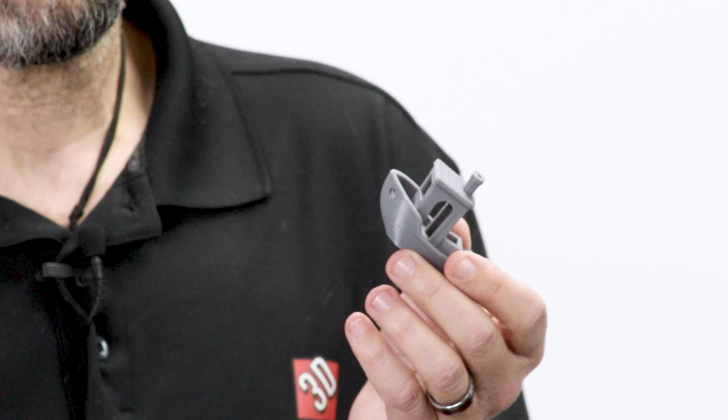Benchy because this is actually the test print that came on the SD card. First company that I've ever seen do that. I can't say the first company that's ever done it because I don't know that for a fact, but first company I've ever seen. And here it is, and it came out great. So there was no calibration, it was a pre-sliced G-code file, done.

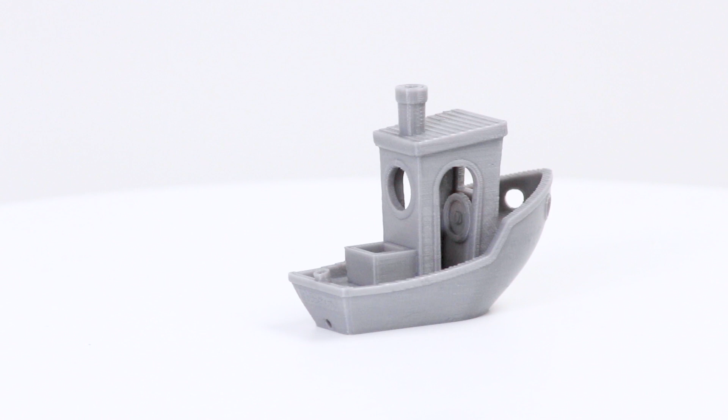We wanted to get a little bit more creative here. So, who doesn't love Stan Lee? I love Stan Lee. Anyway, found this model, I believe, on MyMiniFactory, and just wanted to slice my own file. So let's take a quick look at the screencast and I'll show you what I did, and then you can watch it print. Oh, exciting, I know. Take a look.

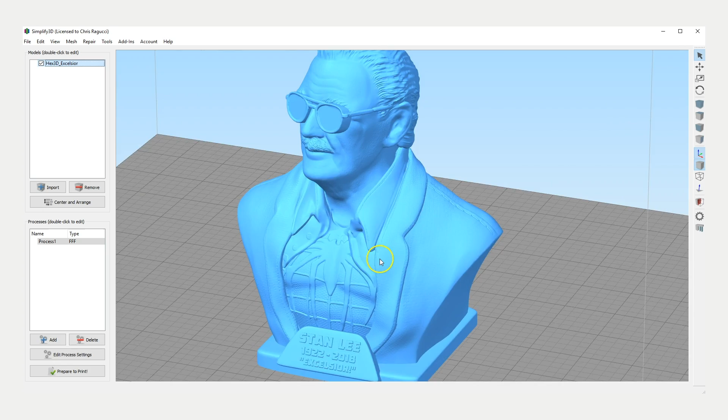Okay guys, here we are in Simplify3D. I've imported the model already. This is Stan Lee. Take a look at him here real quick. All right. So let's go to the process here. Now we're just doing the first single left-hand side extruder here. So I have mine named after Transformers, as you probably all well know. T-Rex is Grimlock, so here we go.

Single left. So we're going to do this at 0.2 millimeter layer height, 5 top, 5 bottom, 2 shells. I always do my first layer height just a little bit thicker, just so I get really nice adhesion on the bottom. I am going to add supports, and I always use a brim, and I'm going to run this at 70. So let's take a look. I'm going to actually let it auto-generate supports because this model doesn't really need many supports, so what it provides will be okay. So we've got that going.

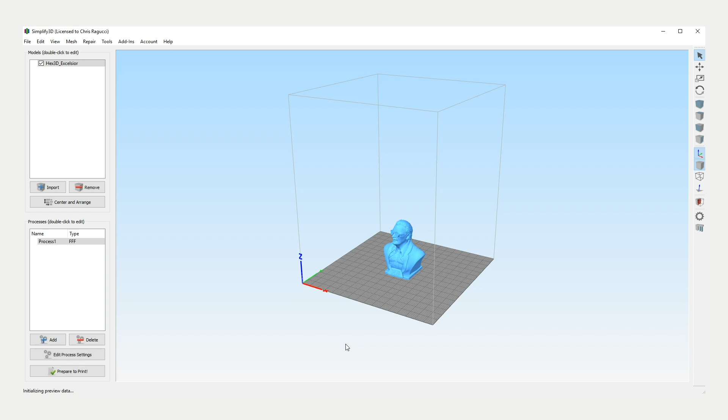I'm going to prepare it to print. And here we go. Here's what we have here. So it's just popping these supports in down here. A little bit here, a little on his face, and that's okay. I'm gonna exit out of here for a second again, just so you can see the supports, the way they're set up. Actually, we should bump this up a little bit.

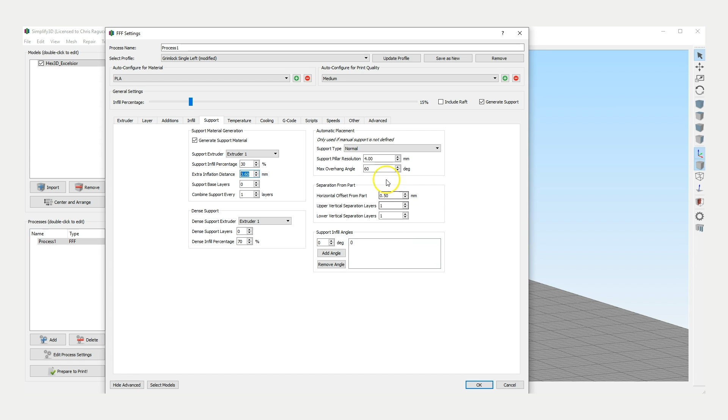I typically go support infill at 30%, and the extra inflation distance doesn't need to be quite that high, so we'll put that at 0.6. And whenever I use a 0.4 millimeter nozzle, I usually find it's okay to do vertical and upper and lower separation at 1 layer. And I don't particularly enjoy using dense support layers. I have a really difficult time pulling them off. So let's go back and we'll reslice that.

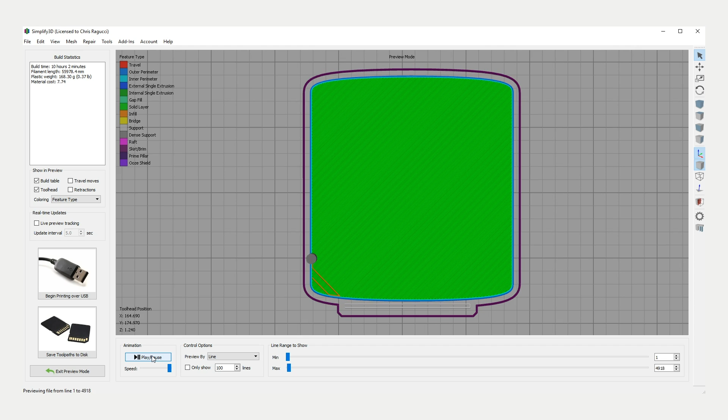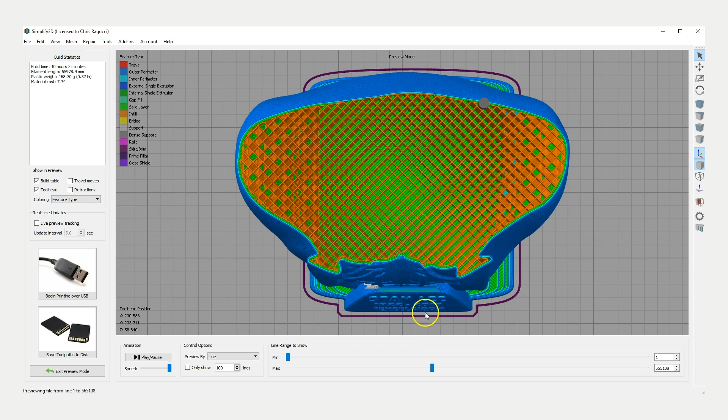And here we go. So let's take a top view and we'll run through the slice real quick. And we'll just speed through this a little bit. You can see where it's putting the supports in there. Right there, just in case you didn't see. And we'll keep going. All right, that looks great. And there we have standard left only extruder mode.

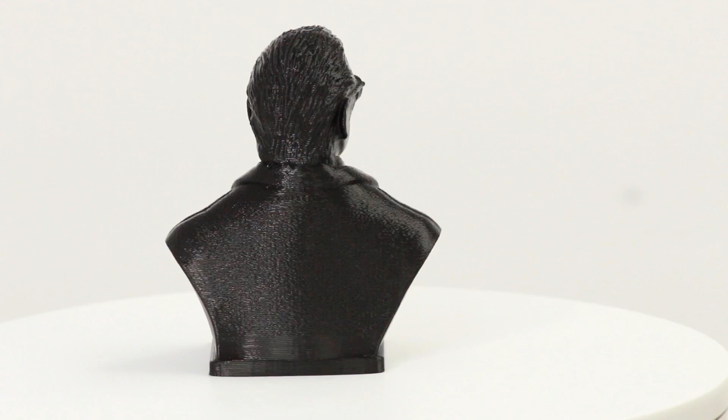All right, and it is a dual extruder machine, so I suppose I would be not doing this machine any justice if I didn't show you a dual print. Now, keep in mind, I didn't super calibrate the machine, so there's a little color bleeding in the print, but here we go. Ta-da! 2-color print.

I also used an ooze shield and a prime pillar. There's a difference between a prime pillar and a purge block. A purge block is just something you would see on something that's multi-material or something that prints with 2 colors out of the same nozzle.

Prime pillar, all this does is when one extruder stops and the next extruder moves out to print, before it starts to print, it actually just runs a little square and fills it in, so it primes the nozzle, the filament's moving, and then it just jumps right over and starts the print. So it helps. So did that with these. You can see my ooze shield had a bunch of goo in there. That would have been on the print if I didn't use this.

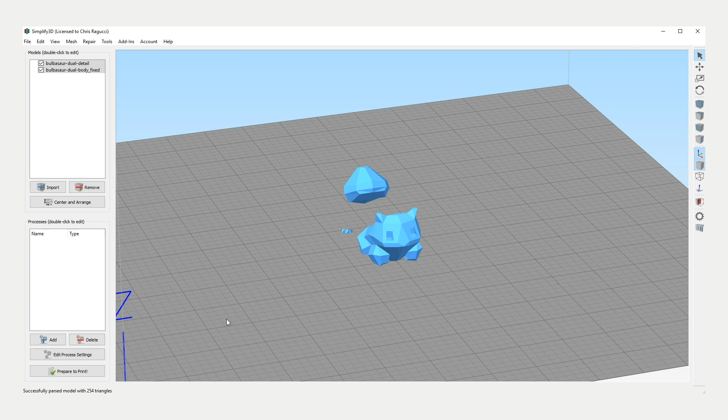And here we go. But I'll show you how I slice that right here. Okay guys, here we are with the Bulbasaur, and we are going to do our first dual extrusion print with the T-Rex. So I've already imported the models. Now you can see this is 2 models. So here's part 1 and part 2.

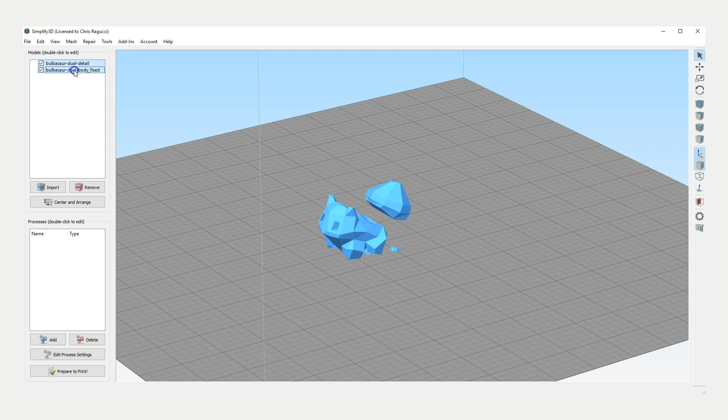Now, for those of you who don't know, in Simplify3D, there's a great trick to align these models. So you can actually go up under Edit, and you can do Align Selected Model Origins. But I only had one selected, so that was dumb. So again, we'll do Align Selected Model Origins, and it puts them exactly where they're supposed to be.

Now, there's a shortcut to that. If you hold down Shift and click Center and Arrange, it does the same thing as long as you have all the models selected. So there you go. Neat trick. It took me about a year before I learned that one, so you're welcome.

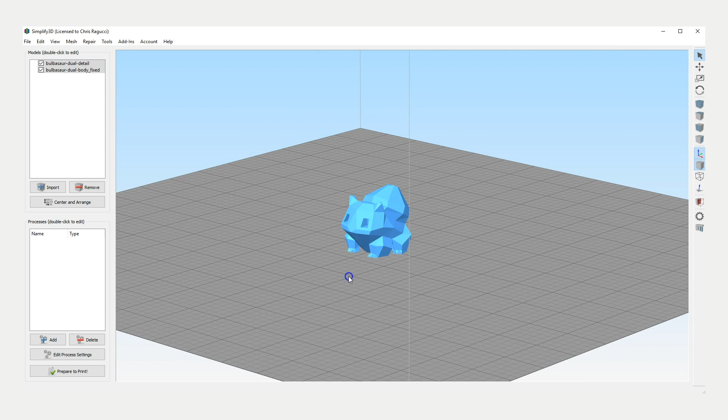Anyway, so here's Bulbasaur. Now what we're going to do is we're going to use both extruders on this. So I'm going to add my first process, and it's going to be Grimlock, as I already said, Transformers. Yep. So Grimlock left dual is going to be 1. I don't want to save those changes. And then we're going to select the models. And I'm going to select the body.

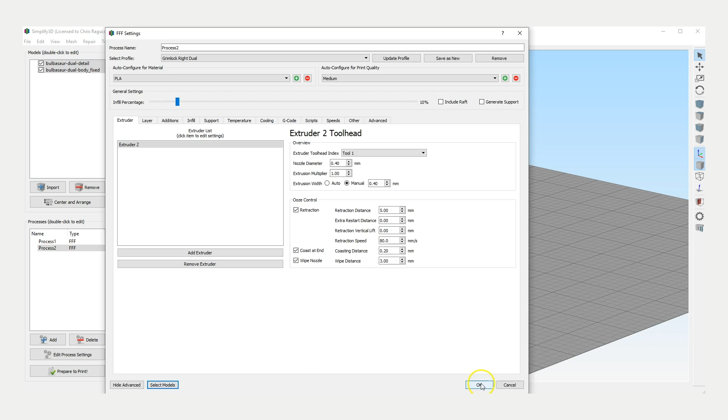And now I'm going to add a second process, right dual, and I'm going to select just the detail. Okay, so now just quickly before I do anything else, I'm going to show you how that works. So if I hit Prepare to Print, I select both processes, and right now it's just showing you the feature type. Now I'm going to change it to Active Toolhead.

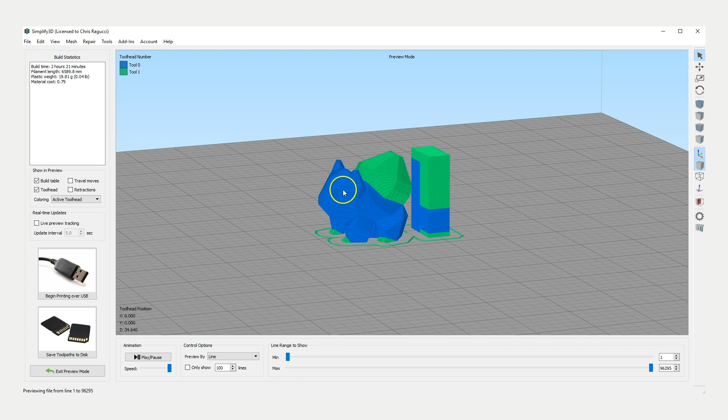So you can see, very simply, the left extruder is going to be printing what is on screen as blue, and the right extruder will be printing what's on screen as green. So you'll probably notice this guy back here. This is not a purge block. Do not get it confused with multi-material devices that print out of the same nozzle. This is a prime pillar. Kind of the same thing, but not really.

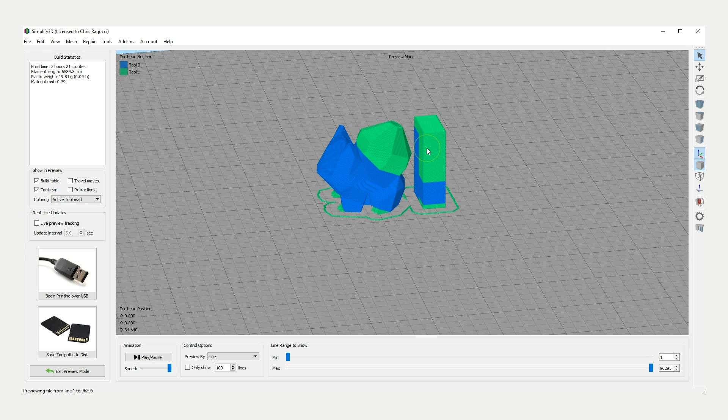What I do is I have the prime pillar set up, so when the extruders switch, it just prints one little layer on this block just to prime the nozzle because it's been sitting. So I want that filament flowing nicely before it actually starts to go over and start my print. So let's go back out. And we'll just show you.

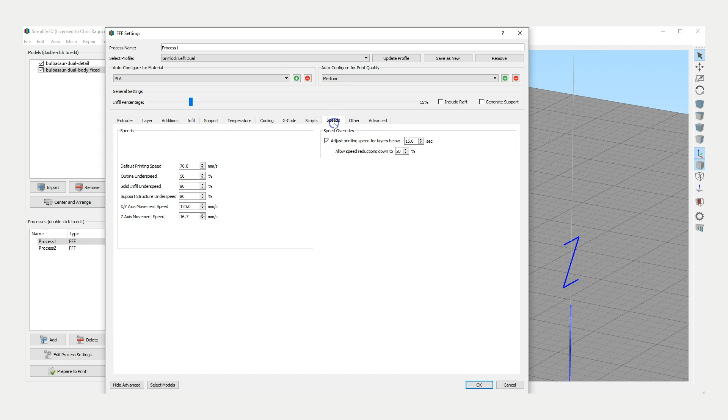So we're going to do the same thing, 15% infill. We're going to do the same thing with the 0.2 millimeter layer height, 5 top and bottom layers, 2 shells, and all that good stuff. Speeds, we'll do the same thing at 70. And we'll go back, prepare to print.

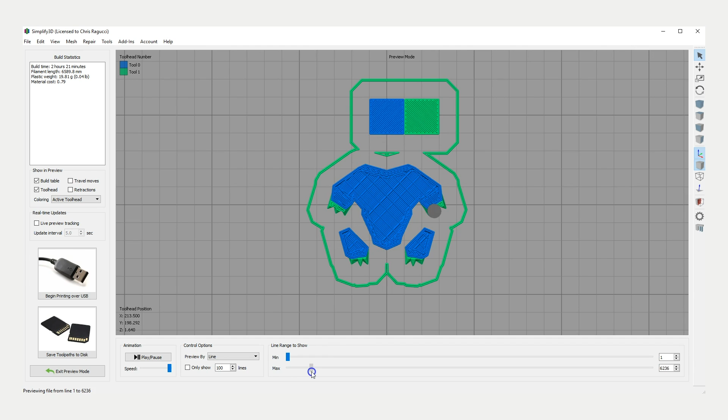And here we go. Let's get a top view going. And I will show you again. This time I'm just going to speed through it. So you can see it's printing both colors 1 layer at a time. But right now you notice that over here, it's only printing in the blue. That's because there's no green. So it's only printing with the left extruder for these layers, not the right extruder.

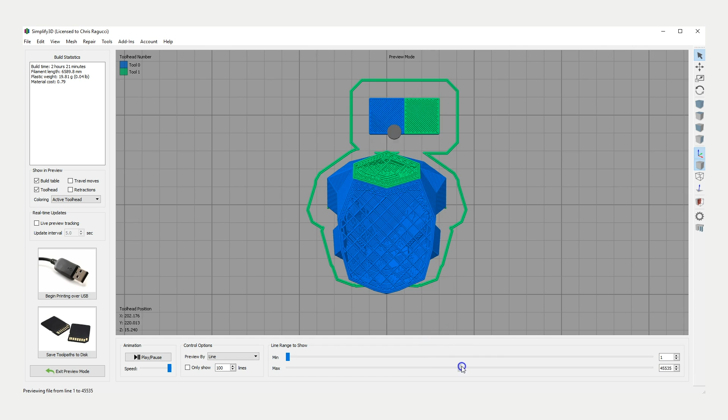And we'll keep going. And then as soon as we get back to a point where it's got to print in 2 colors again, you'll see that that switches back right there. So now it's starting his shell here, so it's going back to the other side too. And there he is.

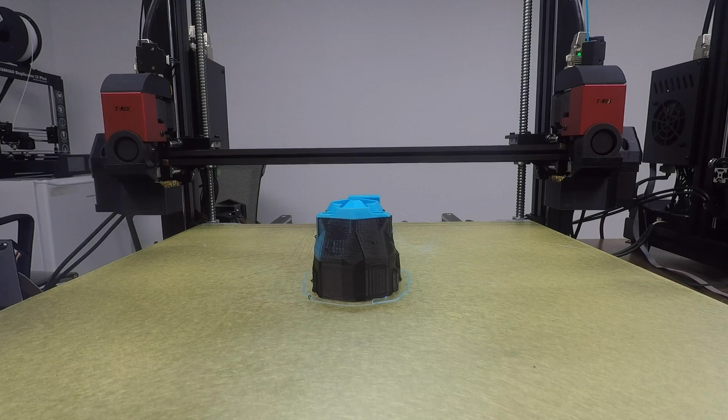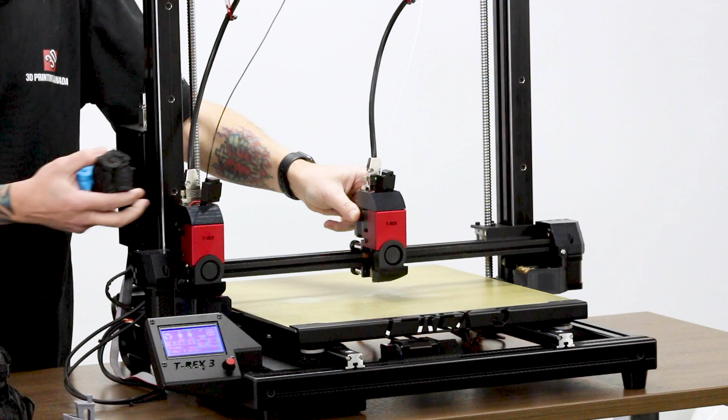All right, the next mode that I want to talk about is really cool, which is one of the major features that drew me to this machine ages ago. So this is duplicate mode. What you basically do, and I will show you in a second, is you set up your slicing profile and you basically cut your bed in half. One extruder moves over and then they move in unison and they make the same print twice.

So you can see on the right, which is tool 0, I printed an owl. On the left, which is tool 1, I printed an owl. They're the same, except they're different colors. This one's black, this one's blue. You get the difference, right? Anyway, so that's actually super easy to do, and I will show you how to do that right now, and then right after that, you can watch a time lapse of the print.

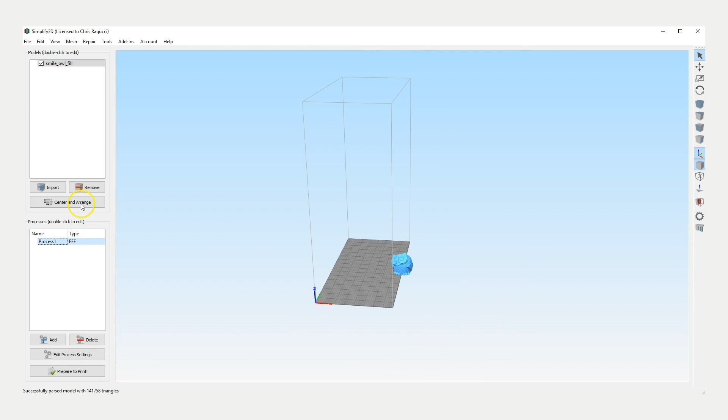Okay guys, here we are. Now we are going to do something really cool. This is called Ditto mode. So I've already dropped the model in place, and I don't have any process set up yet, so I'm going to add a process. This time I'm going to go to Grimlock Ditto. And you're going to see what happens to the bed right now. Now it actually takes the bed and it cuts it in half. So I'm going to center and arrange that. So my model is sitting right in the middle.

Now, I don't want supports on this model, and we're going to go with pretty much the standard settings that I usually have. Let's see, my retraction is probably set a little too high, so I'll go back down to 5 on that. And top, bottom, everything the same.

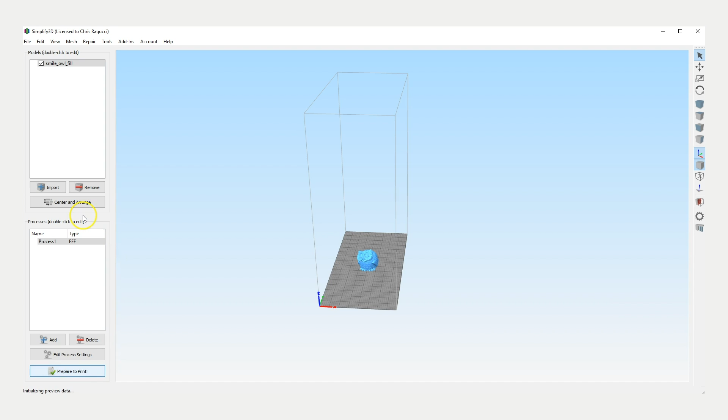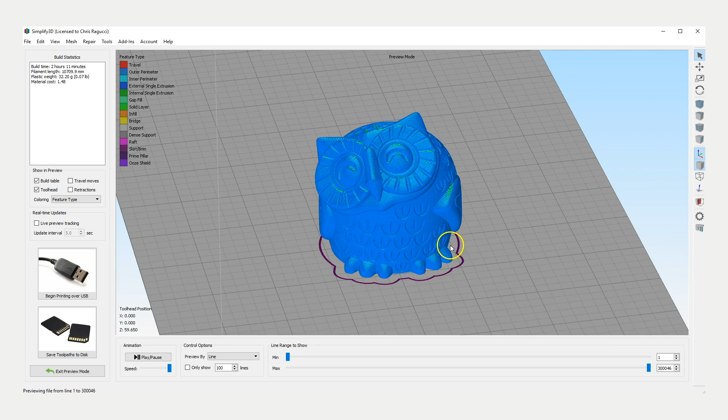So we've got the owl. We'll do a quick run through here. Just moving up. It's a lot of infill. Whatever, we'll leave it.

That was my cat jumping up on my chair.

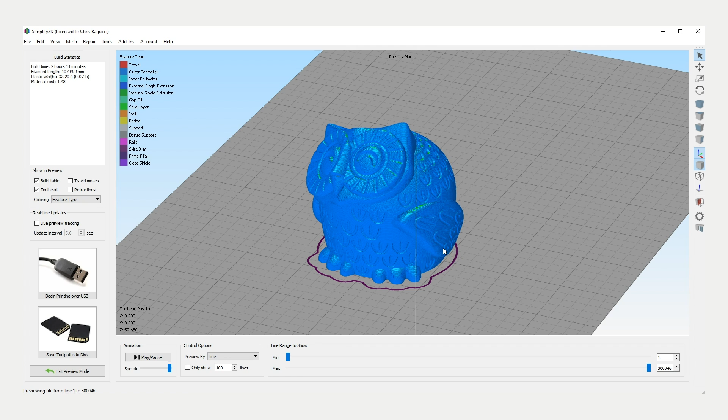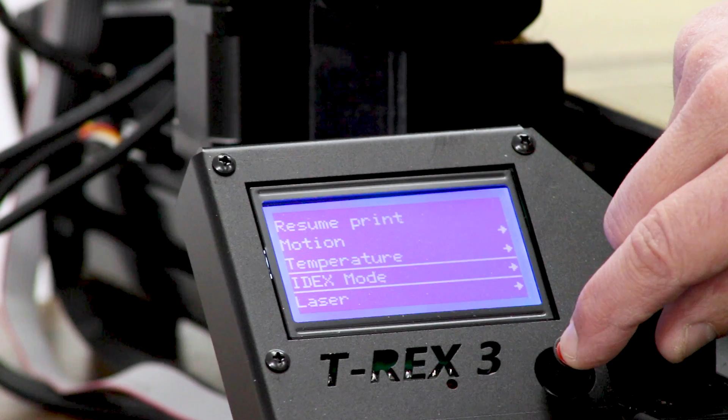And there we go. So now, when we go back to me on the camera, I'm going to show you how this works and how it prints 2 copies of the same thing. So stay tuned. Okay, so something they added in the new version of the T-Rex 3, which I think is a much, much better way of doing things, is you can just control this mode situation here on the screen. So if you go into IDEX mode, I am going to choose duplication. As soon as I do this, watch what happens. I'm going to get out of the way.

So now, as you saw in the screencast, I took that bed that was basically cut in half, so it's only 200 millimeters this way, but still 400 and 500. These 2 extruders are now basically locked together, and they're gonna print 2 identical pieces. Just like this. In fact, it's these 2, because I already shot the time lapse. Shh, don't tell anybody, but watch it here.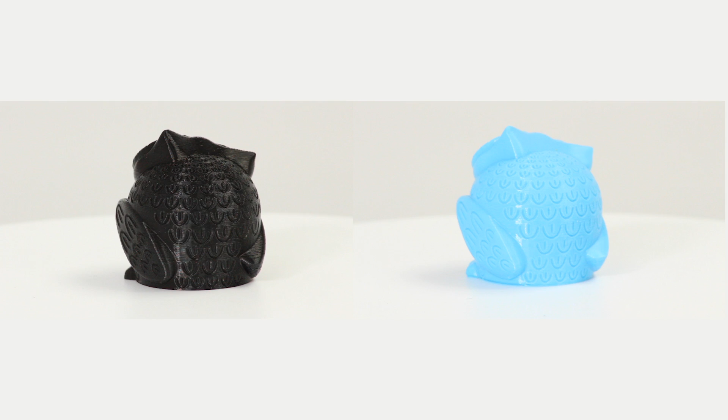Okay, one more mode I want to show you. Mirror mode. What's different about these? They're not duplicate. They are opposite. That's mirror mode. This is a new feature they added in the T-Rex 3. This is not available in the T-Rex 2 Plus or the T-Rex 2. This is new and exciting and fancy. So it's actually pretty easy to do. It's pretty much the same way.

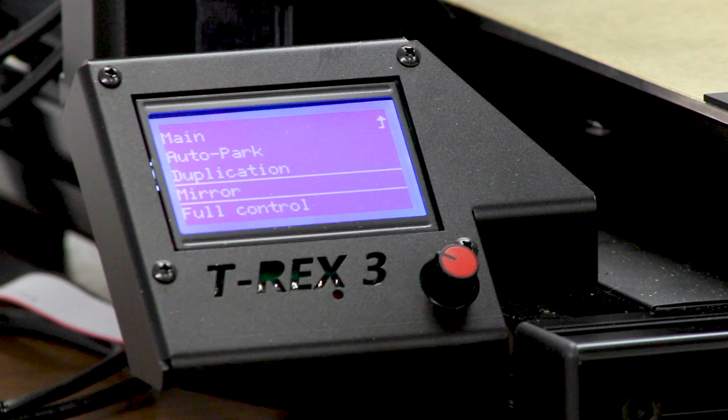I'm gonna come back around and show you how that one works. Go back into IDEX mode, and then just go to mirror. And it's gonna basically do the same thing. And now it's ready to print in mirror mode, except when it prints, you'll see in the time lapse, they're not, I don't need to explain this, you know what I'm talking about, you'll see it. Anyway, watch how I sliced it, and then watch the time lapse.

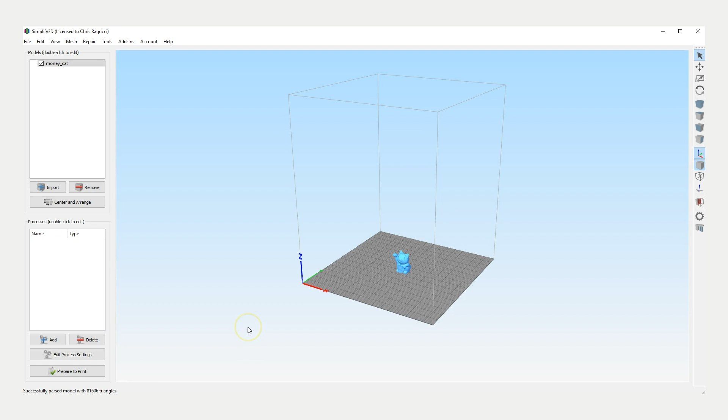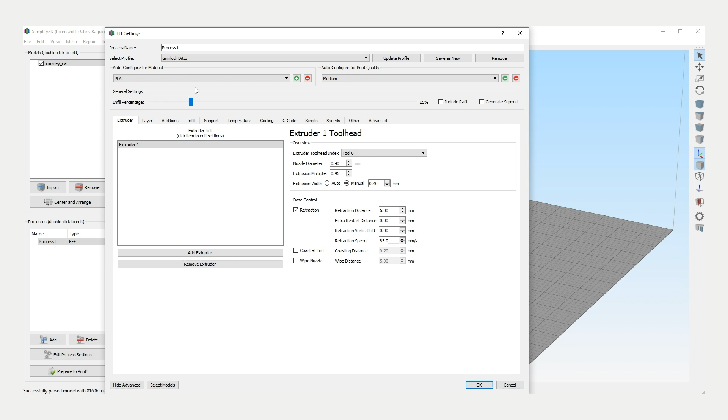Okay, and here's the last one. So we have our little fortune money cat guy, and we'll zoom in here a little bit so you can see him. So now we're gonna do the same thing, we're gonna add. Now, I'm gonna change this back to ditto mode because it's the same exact slicing profile that you use for either duplicate or mirror mode. But the difference is the way you set up the machine from the control panel on the actual machine, on the knob, on the LCD thing.

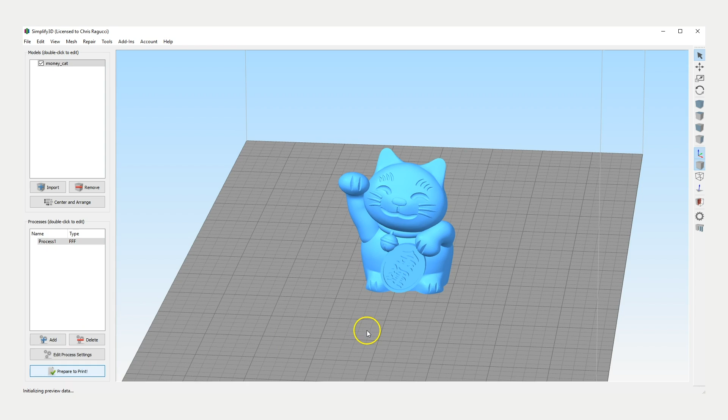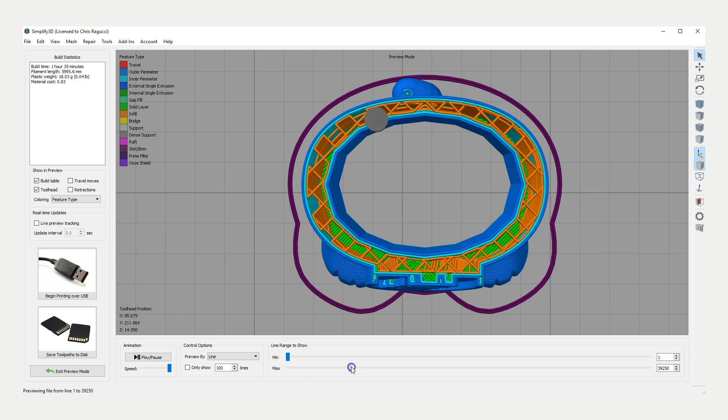Anyway, so we're gonna go okay. We'll center and arrange so we put it right where it's supposed to be. And we'll take a look at our little cat waving. Okay, so since we have all the settings, I am just going to prepare to print. Here, we'll do a quick bottom-up slice for you. Top view. No supports. And there's our cat.

All right, there you have it. I really can't stress enough, and I know I said this in the other video, so go back and watch it if you didn't see it. I can't stress enough how much I love this machine. I've owned one for quite a while now, and I was ecstatic when we brought them into the store here. It's an amazing printer. It has every feature I could possibly want. I've upgraded a bunch of my other machines and spent more money to get something similar to this, and it's still not the same. So at the end of the day, you get what you pay for.